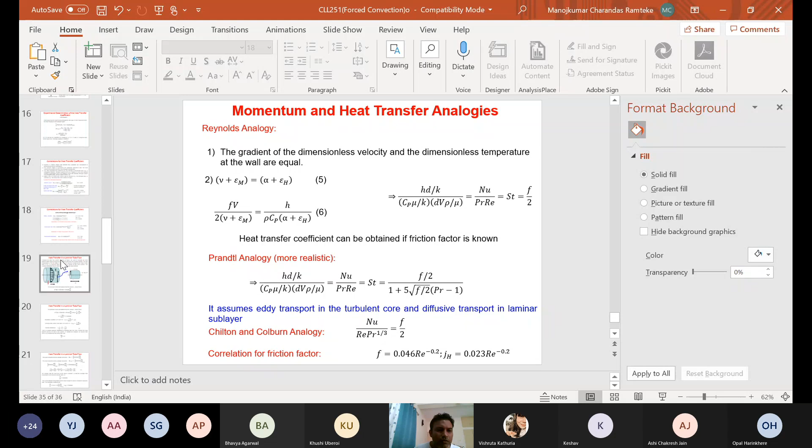Until the last class, what we have covered was the concept of boundary layer, then dimensional analysis. Based on the dimensional analysis, we said that different dimensionless numbers are going to be important when we are looking at the correlations. Then we looked at how to calculate the heat transfer coefficient, and after that we looked at different correlations.

Even though the dimensional analysis gives me the information about what dimensionless groups are important for a particular heat transfer, most of the time the formulation of this correlation is done such that it is close to reality. For example, in this correlation given by Hausen, the Nusselt number is given as 3.66 plus a term which is a function of Reynolds number and Prandtl number. This value of 3.66 is not coming arbitrarily - there is some logic behind it.

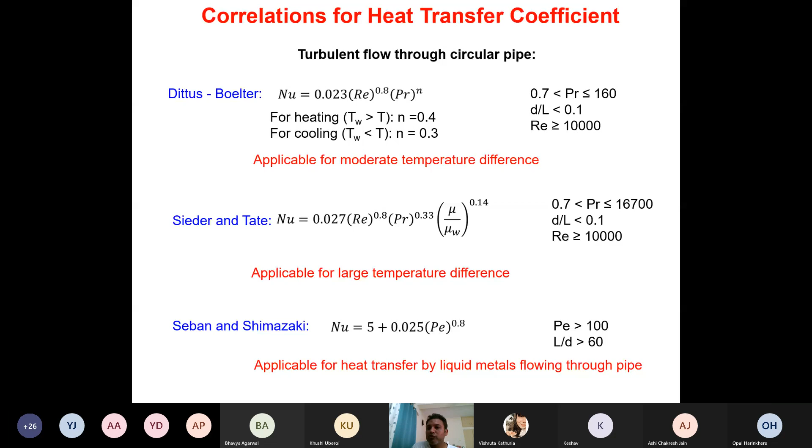So one simple analytical derivation we are going to look at is for pipe flow. Of course this is a very simple case, but even for a simple case of pipe flow, you can see the mathematics becomes really difficult. That is the point why people have made correlations instead of solving it analytically, because that becomes mathematically almost impossible to solve. So in this case, consider a tube flow system as shown in the figure.

We wish to calculate the heat transfer under fully developed flow conditions when the flow remains laminar. The wall temperature is TW, the radius of the tube is R0, and the velocity at the center of the tube is U0.

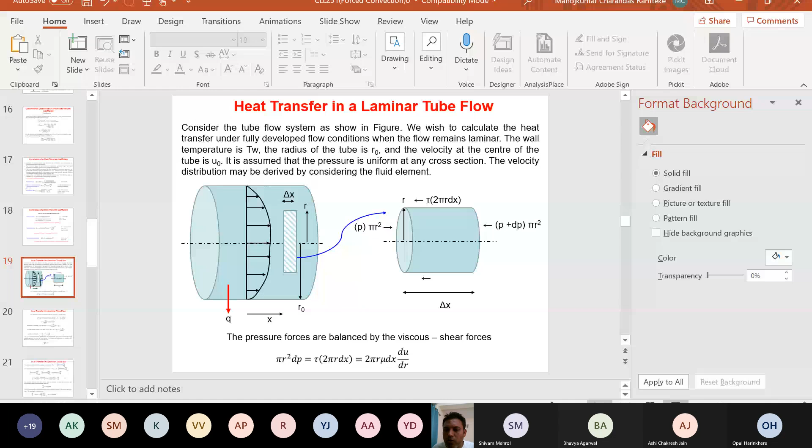It is assumed that the pressure is uniform at any cross section. Hello, yes, slides are not visible. Sir, your screen. Yes sir, okay let me just share. Is it visible now? Yes sir, okay.

So it is assumed that the pressure is uniform at any cross section. The velocity distribution may be derived by considering the fluid element. So here this is the section of the pipe shown, and the velocity profile is also shown. In this particular case, clearly for pipe flow, along the radial direction the heat transfer area is going to change, and therefore a shell balance is made.

So this is a particular shell with thickness of delta x along the x direction. So this shell is analyzed separately. For this particular shell, the thickness of the shell is delta x. The force input on the left hand side is P into pi r square, whereas the force input from the right hand side is P plus dP into pi r square. Again, the shear stress is acting in the opposite direction, so that is tau into 2 pi r dx. So this is tau, okay.

So we can make a force balance here for a given shell. The force balance in this case is the pressure forces balanced by the shear stress, isn't it? So if you put all the input and output terms here, what you get is pi r squared dp should equal shear stress tau into 2 pi r dx. And if you rearrange the term, tau can be represented as mu du by dr.

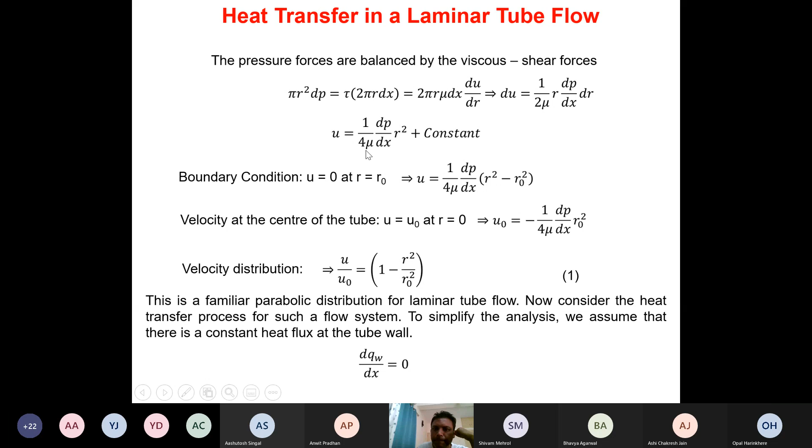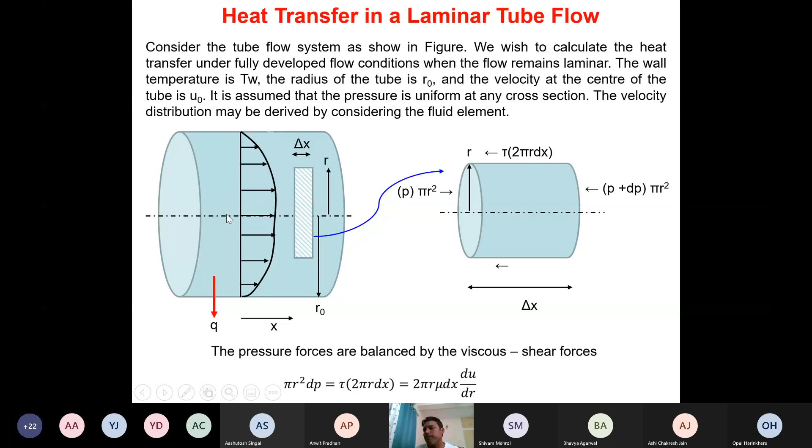If I go back, the temperature here is TW at the wall, and at the center the temperature is, let's say, TC. Between TC and TW there is a variation in temperature, and because of that viscosity may change, Cp may change, the density may change, and there is also a change in velocity taking place. So all these factors are accounted for in calculating the average value of temperature, averaged over all the variable quantities -- radius is changing, rho is changing, Cp is changing, velocity is changing, and temperature is also changing, isn't it?

So this temperature Tb is nothing but the average temperature over all these variable quantities like R, rho, Cp, and u.

So this is nothing but a bulk temperature, also referred to as cup mixing temperature. Now we wanted to find out Tb, because the heat flux is given as h times (Tw minus Tb). Tb we can directly obtain from equation number 3.

So equation number 3, if we put it in this particular expression and integrate it, what we are supposed to get, I have not done the integral directly here, but I am giving you the final answer. The bulk temperature is obtained as Tc plus 7 by 96 u naught r naught square, dou t by dou x, divided by alpha.

So this is what you get from equation number 3 and this definition of bulk temperature. If you put equation number 3 in this integral and solve it, what you get is this next expression: Tb equals Tc plus 7 by 96 u naught r naught square by alpha into dou t by dou x.

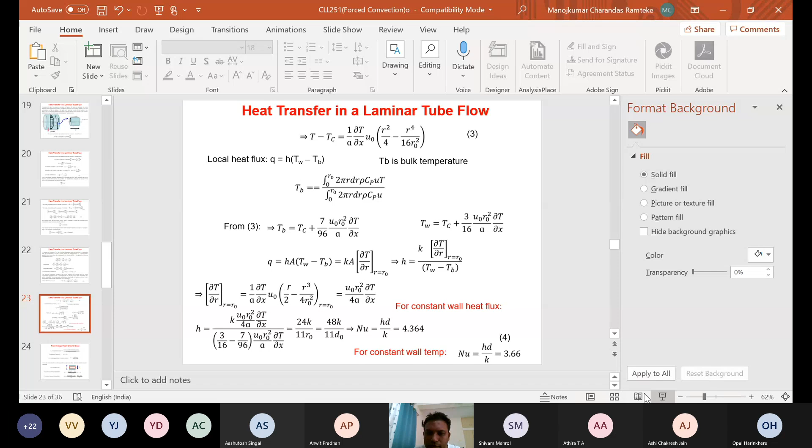Sorry for this mistake. So the heat transfer coefficient is obtained as K dou T by dou R at R equals to R naught, divided by Tw minus Tb, and we can put all the parameters here. We know Tw, we know Tb, and we have already calculated dou T by dou R by differentiating equation number 3 and putting R equals to R naught. So all these terms we know.

If we put it in this particular equation, what we get is heat transfer coefficient is obtained as 48K by 11 D naught. And if we rearrange this, what we get is Nusselt number, given as HD by K, that comes out to be 4.364. So this is very important.

The Nusselt number in a laminar pipe flow with constant wall heat flux is given as 4.364. Directly we can write this. So that is why you will see that most of the correlations for constant wall heat flux will start with this number. And in a similar manner, this entire analysis can also be extended for constant wall temperature.

But in that case, one more complication comes into the picture, that is this dou T by dou X term. This is not constant, in fact this is a function of radius r. So this has to be obtained separately, and then this entire analysis has to be done, but that is not done in this particular case. If you do that analysis, it is there in several books.

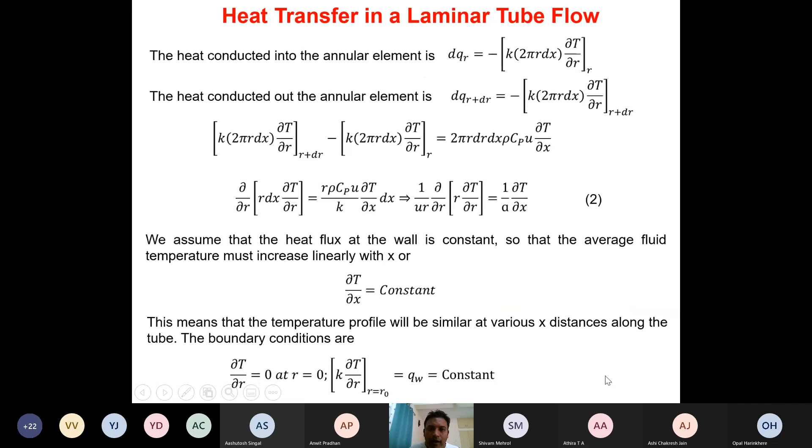What you will get is Nusselt number comes out to be 3.66. So this is the rationale behind using constants like 3.66 in such correlations.

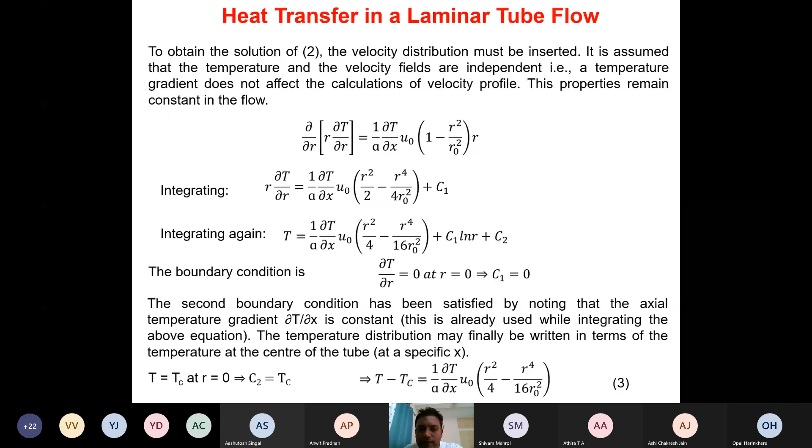Okay, now let us move to the next topic. So far we were looking at the flow through the circular pipe, but in some cases you will see there is an annular flow, in some cases you have a rectangular channel. In all such cases, how to solve the problem? Because most of these correlations are given in terms of pipe flow. So can you apply these correlations of the pipe flow for such non-circular geometries?

The idea of using these correlations of the circular systems or pipe flow for non-circular duct can be done by obtaining the equivalent diameter. So equivalent diameter is nothing but 4 into hydraulic radius. Hydraulic radius is given as the cross-sectional area of the flow divided by the wetted perimeter. This we have already seen in the last tutorial class, where we calculated the equivalent diameter for the annular region as 4 into cross-sectional area of the flow divided by wetted perimeter.

So for a rectangular duct of sides L1 and L2, the equivalent diameter can be obtained as 4 times L1 into L2, where L1 into L2 is the cross-sectional area for the flow, and the wetted perimeter in this case is 2 times L1 plus L2. So the equivalent diameter is 2 L1 L2 divided by L1 plus L2. That's it.

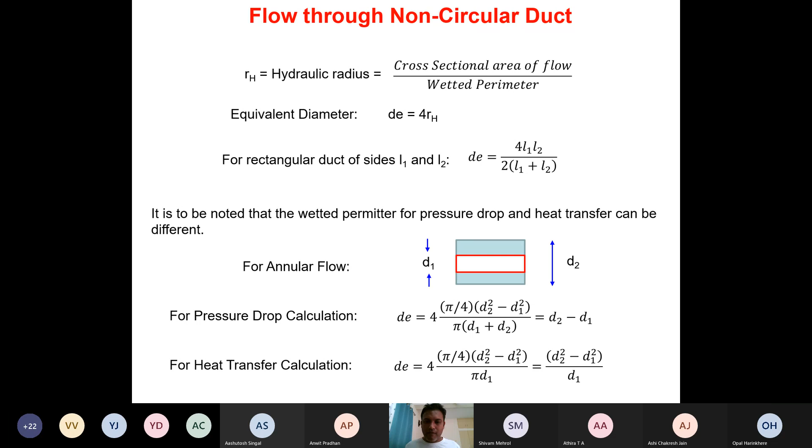Now, so far we were only looking at flow through the pipe or flow through the rectangular duct or something like that. The heat transfer also takes place whenever there is external flow. The first case is the flow over a flat plate, flow across the flat plate. That is the first case. In such cases, the Nusselt number is defined in terms of the distance x.

So x is the distance from the leading edge of the plate. The Nusselt number Nu_x, defined in terms of the distance x from the leading edge, for a laminar boundary layer is given as 0.332 times Reynolds number Re_x raised to the power 1 by 2, times Prandtl number raised to the power 1 by 3.

So this particular correlation we have already seen in the last tutorial. Again, this correlation is valid when Prandtl number is between 0.5 and 50, and the Reynolds number, calculated based on the distance x from the leading edge, should be less than 5 into 10 raised to the power 5.

This 5 into 10 raised to the power 5 is the critical Reynolds number for the flow over a flat plate. So when Reynolds number is less than this value for flow over the flat plate, the flow is laminar.

Beyond this, there is a transition zone. For a turbulent or transition zone, the Nusselt number is defined as 0.0296 Reynolds number raised to the power 4 by 5, into Prandtl number raised to the power 1 by 3. This equation is valid for Prandtl number between 0.6 and 60, and Reynolds number between 5 into 10 raised to the power 5 and 10 raised to the power 7.

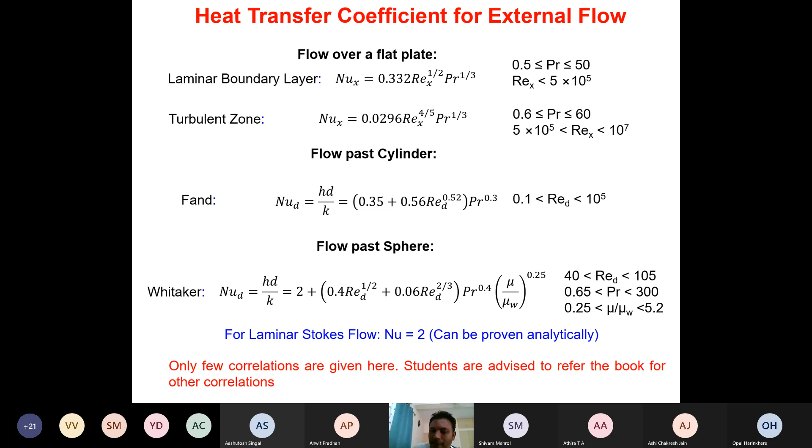All right. Hello. All right, sir. Yes, sir. Okay.

Now let's move to another system. This is a very important system, because it is so regularly used in the industry.

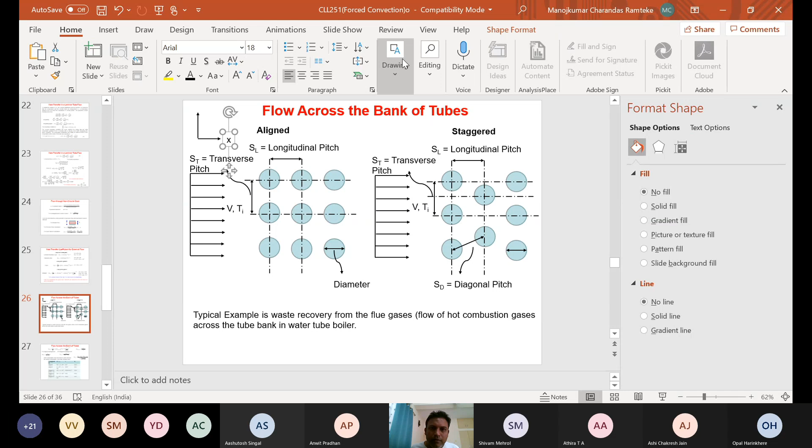So this is the X direction, and this is the Y direction. The tubes are arranged in a Z direction, which is perpendicular to the plane.

And the flue gas is flowing across these tubes in the X direction. So the flue gas flows across the tubes along the X direction.

Now, the temperature of the flue gas on the left hand side is T1, and on the right hand side is T2. As the flue gas moves across this bank of tubes, heat gets transferred because water is flowing through the tubes. This water takes heat from the flue gas, and because of that the flue gas cools down as it moves along the X direction.

Again, this is a commonly used heat exchanger for recovering heat from flue gas. There are two configurations in which the tubes are arranged: the aligned configuration, where tubes are arranged in a properly aligned manner, and the staggered configuration, where tubes are arranged in a staggered manner.

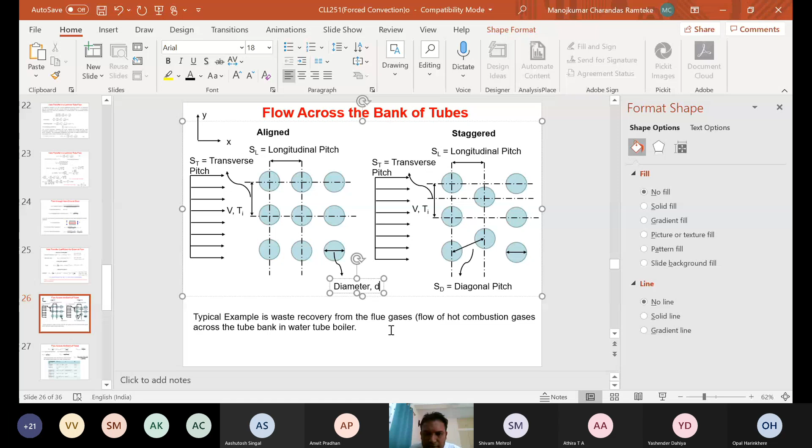Now correlations are given for such systems. The commonly used correlation is the Nusselt number, defined in terms of the diameter of the tube, D. This Nusselt number, defined using the diameter of the tube, is a very important thing here.

It is given as HD by K, equal to C into Reynolds number max raised to the power m, into Prandtl number raised to the power 0.36, and in the bracket, Prandtl number divided by Prandtl number at wall, raised to the power 0.25. This basically gives mu by mu w, since Prandtl number is Cp mu by K; Cp and K are constant, and Prandtl number at the wall is Cp mu wall by K, so this ratio gives mu by mu w directly.

Again here the Reynolds number is based on the diameter of the tube and maximum velocity, and therefore it is defined as RD max, RED max. So this RED max is nothing but the Reynolds number defined in terms of diameter of the tube and maximum velocity. So this is given as d rho V max by mu, where V max is nothing but the maximum velocity.

Why we are saying the maximum velocity? Because as the flue gas, which is having a velocity of V, moves across this bank of tubes, the cross sectional area is going to reduce because some of the area will be occupied by the tube. And since the area is minimized, the velocity of the fluid flowing across this tube is going to increase, and that velocity is defined as maximum velocity.

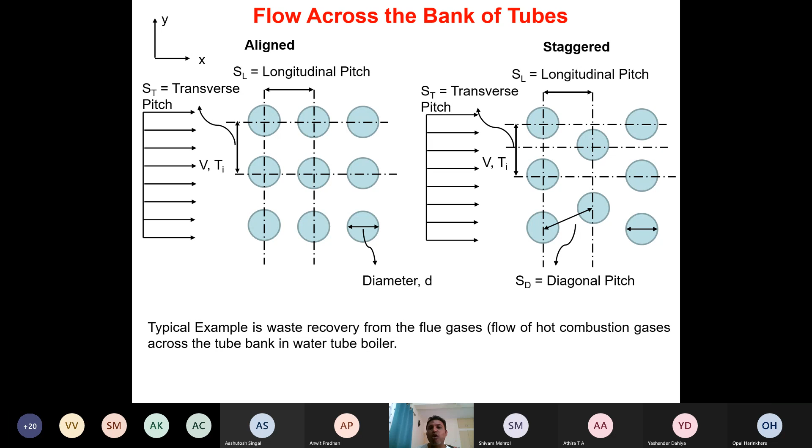So clearly the temperature difference at one end here is going to be TW minus T1, whereas the temperature difference on the right hand side is going to be TW minus T2. And this TW minus T1 and TW minus T2 temperature difference is going to be different as we move from left hand side to right hand side. And in such cases, what we have to use is log mean temperature difference.

Remember, that is what we said, when the driving force is changing as we are moving along the x direction or along the length, in such cases, instead of using the normal temperature difference, what one has to use is log mean temperature difference. And therefore in this case the temperature which has to be used is log mean temperature difference, which will be defined here as Ti minus Ts, minus T naught minus Ts. So T naught is the temperature on the right hand side, Ti is the temperature on the left hand side, and delta Tm is the log mean temperature difference.

Again, as I said, there are different configurations: aligned, staggered, and also the Reynolds number is going to vary. So depending on that, there are different configurations possible. One is aligned with Reynolds number between 10 raised to power 3 and 2 into 10 raised to power 5. Another is aligned, but the Reynolds number is above this particular limit.

Then there is a staggered arrangement in which ST, which is the transverse pitch, divided by SL, which is the longitudinal pitch, if it is less than 2 and the Reynolds number between 10 raised to power 3 and 2 into 10 raised to power 5, in that case different constants of C and M has to be used. So these are the different configurations. For different configurations, the constant C in this equation and the constant M has to be selected from this table, and then based on that the correlations have to be used to calculate the heat transfer coefficient.

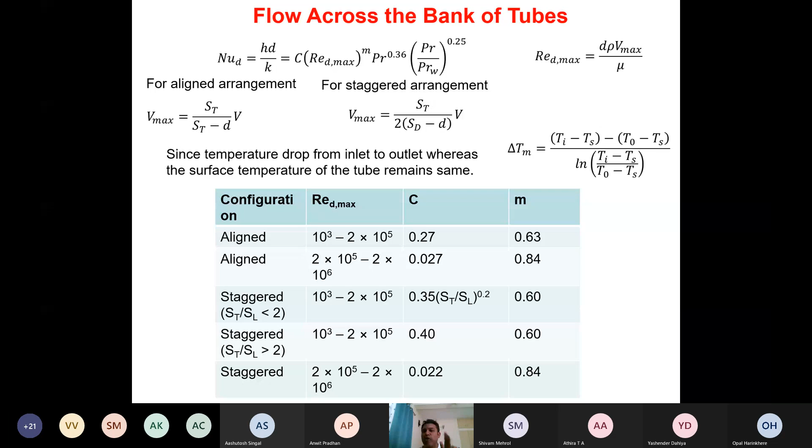So anyway, we are going to see this particular case in more detail when we look at the tutorial problem. So in the next tutorial, we are going to look at the problem solved on this.

So, the flow past the bank of tubes—in most chemical applications you'll see a packed bed or a fluidized bed where flow takes place across different packings. These packings could be spherical or in other shapes. For such cases, for a packed bed, the heat transfer correlation to be used is given here.

Here epsilon is the voidage factor. ST is the Stanton number, which is the Nusselt number divided by Prandtl number into Reynolds number, into Prandtl number raised to the power 2/3, and that is given as 2.06 Reynolds number raised to the power minus 0.575. Here Reynolds number is defined in terms of the diameter of the particle.

This is valid for Prandtl number equal to 0.7, and Reynolds number between 90 and 4000. Here Reynolds number is defined in terms of superficial velocity and diameter of the particle. A similar correlation exists for a fluidized bed: the Nusselt number, NuDP, is given as HDP by K equals 2 plus 0.6 Reynolds number raised to the power 1/2, and Prandtl number raised to the power 1/3.

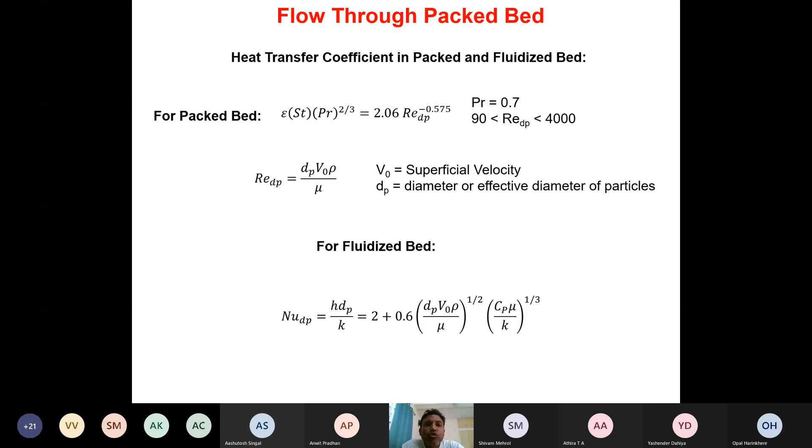Important factor now—important. We wanted to see heat transfer with a variable driving force. Remember, so far whenever the driving force delta T changes across the length, we used delta T LMTD, log mean temperature difference. At that time I said we would see the derivation later. For now, let's assume that whenever temperature difference or driving force changes across the length, we have to use a log mean temperature. So let's derive that.

The calculation of the rate of heat transfer becomes very simple if the overall heat transfer coefficient, the area of heat transfer, and the temperature driving force all remain constant. But if you look at most practical cases, one or more of these is varying.

If you look at a cylindrical system, the heat transfer area is varying. Again, when we look at boundary layer heat transfer, the heat transfer coefficient varies as we move from x equals 0 to some value x equals L. So as we move from the leading edge, the heat transfer coefficient varies.

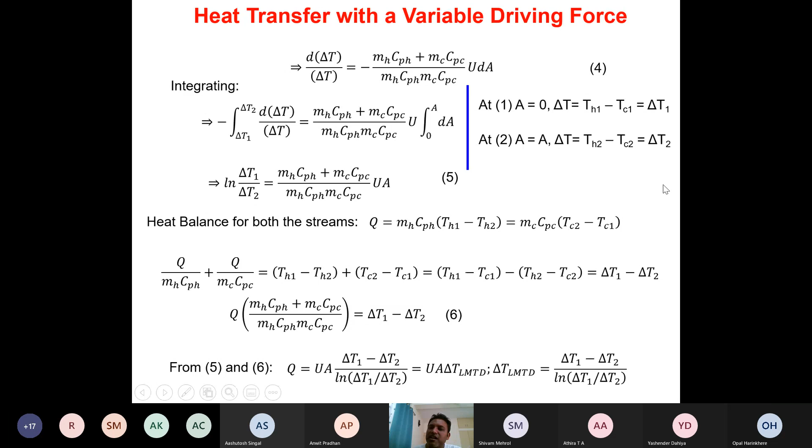Now in this case, this factor, mHCpH plus mccpc divided by mHCpH mccpc, can be eliminated by making an overall balance. So let us make an overall balance between these two ends. Whatever heat is lost by the hot fluid should be the same as whatever heat is gained by the cold fluid, and that is what is written here. So heat lost and heat gained both should be the same, equals Q, and heat lost is given as mHCpH, TH1 minus TH2.

So this is the balance between both ends, 1 and 2. The temperature changing between end 1 and 2 is TH1 and TH2, therefore the entire temperature difference is TH1 minus TH2. And that should be the same as heat gained by the cold fluid over the entire length L between locations 1 and 2, so that is given as mccpc, TC2 minus TC1.

Now from this equation, Q by mHCpH is given as TH1 minus TH2. Similarly, Q by mccpc is given as TC2 minus TC1, and both these factors can be summed up. So Q by mHCpH plus Q by mccpc equals TH1 minus TH2 plus TC2 minus TC1, and this right hand side can be rearranged.

So TH1 minus TC1 we can put as one factor. What is the remaining thing? Remaining is minus TH2, so we can take a minus sign here, and in another bracket we can have TH2 minus TC2. Remember, TH1 minus TC1 is nothing but delta T1, whereas TH2 minus TC2 is nothing but delta T2. So that means delta T1 minus delta T2 is nothing but this entire factor on the left hand side, so this left hand side factor can be rearranged as Q.

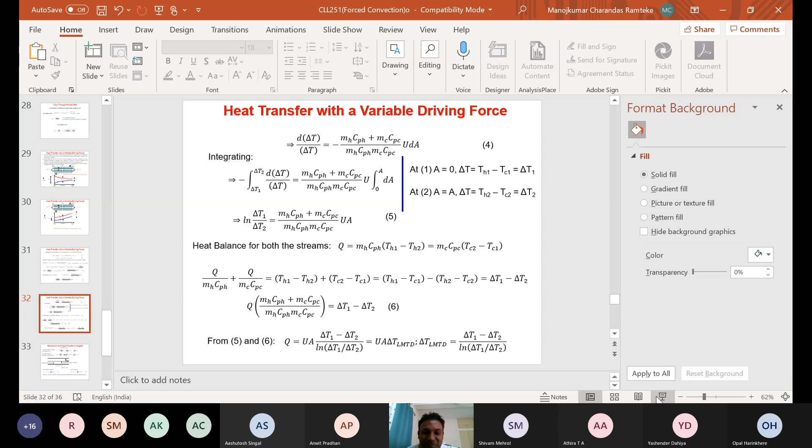Anyway, so the point I wanted to make here is, for a co-current flow, the heat transfer Q is given as UA delta T LMTD, and not UA delta T. Why? Because the temperature difference delta T is varying as we are moving from location 1 to 2.

Now another question you can ask: if let's say delta T1 is same as delta T2, in that case Q is obtained as UA delta T1 or delta T2, doesn't matter. You can directly get it from this equation. If you apply L'Hopital's rule, then what you are going to get is Q equals UA delta T. That's it. The same expression you are supposed to get if you solve it.

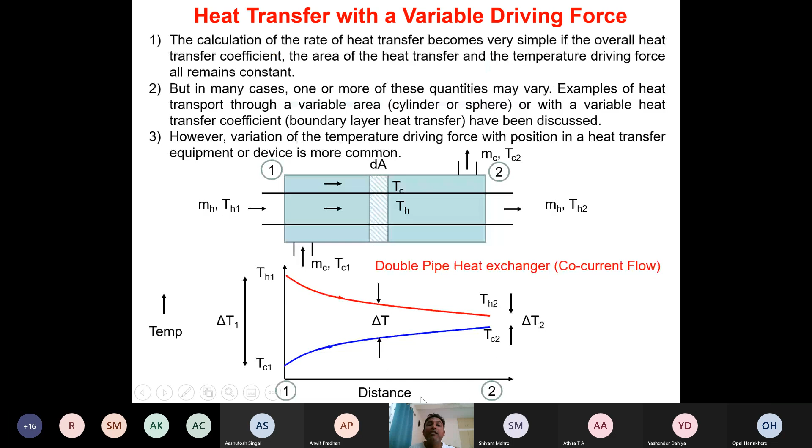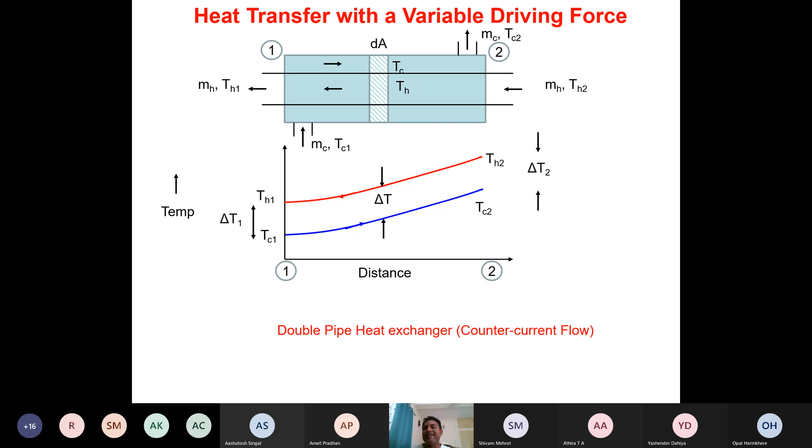Remember, in this case we have solved it for co-current flow. But if you do the same analysis for the counter-current flow, which is the second figure, you are going to get the same thing. In fact, this derivation is given in the book, you can just go through it.

I have done the derivation only for the co-current flow. For the counter-current flow, you are supposed to get the same expression. In case of counter-current flow also, Q is given as UA delta T LMTD.

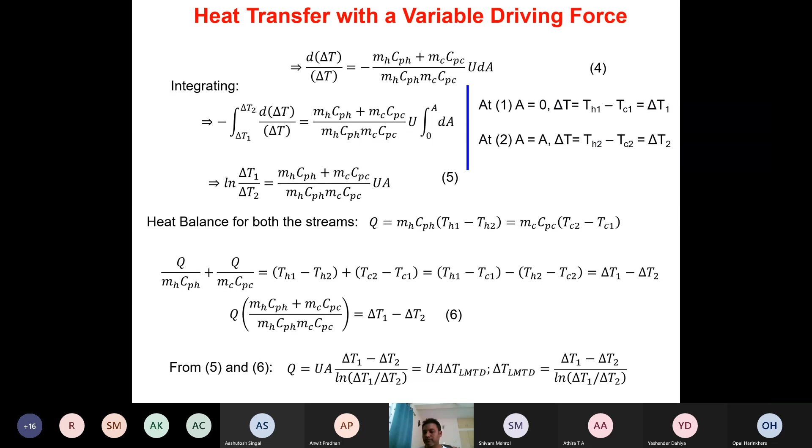That's it, so there's a last topic, but I think it is too much for today, so I will not cover this last topic. We will cover this part maybe in the next class. But I wanted to discuss about the quiz a little bit, and then we will stop. Is it all right?

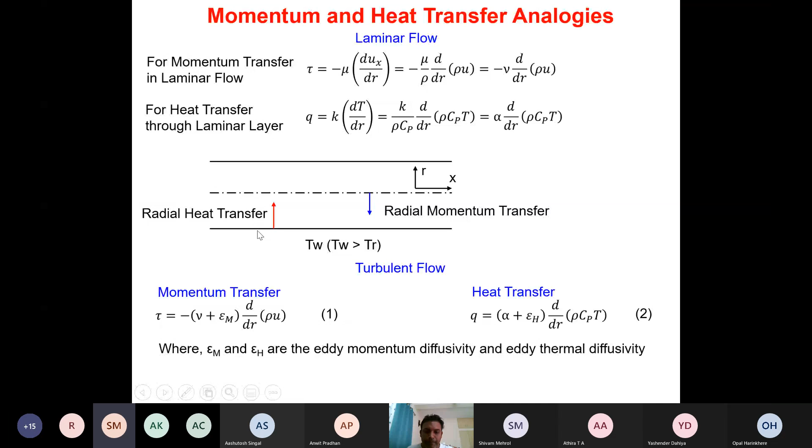Hello? Is it all right? Yes sir, we still have some time before the next class. So I will just quickly share with you the solution of the quiz.

Anyway, most of the students have done well. In fact, there are 4 students who got full marks. Unlike last year when there was a lot of chaos in conducting the examination, this time I felt quiz one was very smooth, not only for me but also for you, because I got fewer queries and I could see that many students have done well.

There is a request from one student, I don't remember the name, the request was to change the examination from the normal numerical type answer quiz to an essay type quiz, where you upload your answers and I have to grade all your answers on Moodle. But that is not realistic. I'm really sorry to say, but that is not realistic in the sense, because I do that.

I generally do that for a size of 50 students when I used to teach the elective course. So every next semester I'm going to take the elective course, I have done the elective course in the last semester. So in all the elective courses I do that type of grading, because...

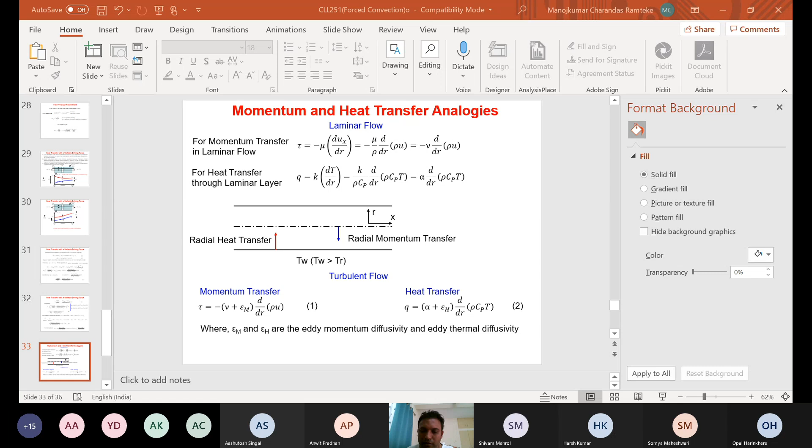So let me share the solution. Is it visible to everyone? Yes, sir. Okay, so the first problem was very easy. Mostly half of the part we have already solved in the class itself, isn't it? You only have to put in the values and get the answer.

Based on that, you can apply the boundary condition: at x equals 0, the temperature was 160, and at x equals whatever the value was for your case, the temperature was 120. You put this in the equation and obtain C1, C2, and then you get the temperature distribution equation. You can differentiate this temperature distribution equation and equate it to 0 to get the location for the maximum.

For the location of the maximum, I could see almost 95% of students have done both these parts correctly, part A and part B. Almost 95% of students have done well, but some students have made mistakes.

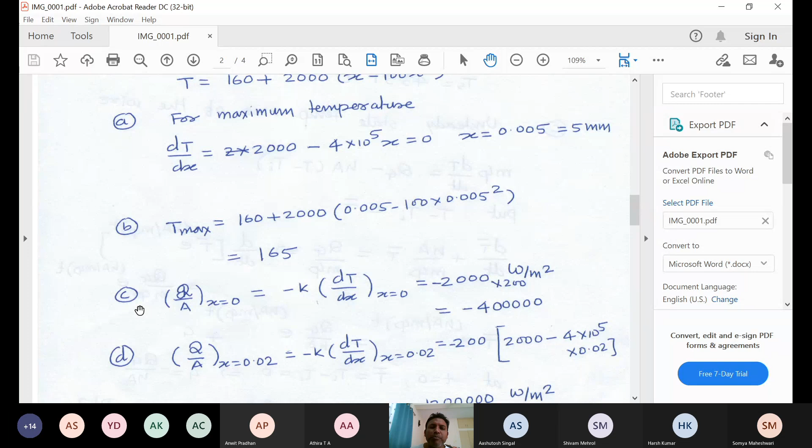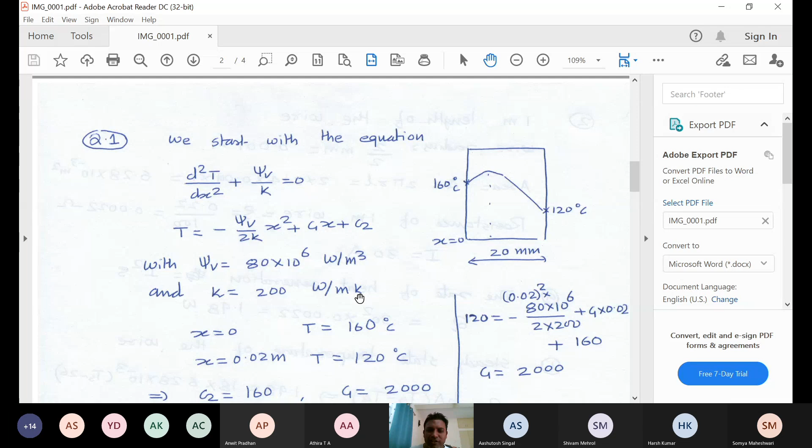In part C, you were asked to calculate the heat flux at this location, the heat flux on the right hand side, and the heat flux at the center. The heat flux on the left hand side comes out to be negative. That comes out to be this C1 into K, minus K. Some students missed the minus sign or something, but these are the places where students made mistakes. Mostly for problem number one, almost everyone got the correct answer. So almost 90% of students got this first question correctly.

The second question was a little bit difficult, but not too difficult because we had solved a similar problem earlier. How to calculate this Q was very clear, because we solved one similar example: I squared rho gives you Q. Here, the radius was varying, the current I was varying, and the transfer coefficient H was varying. So the first thing was very clear - you calculate Q as I squared rho, and you directly obtain that based on the values given. This part, mostly people have done correctly.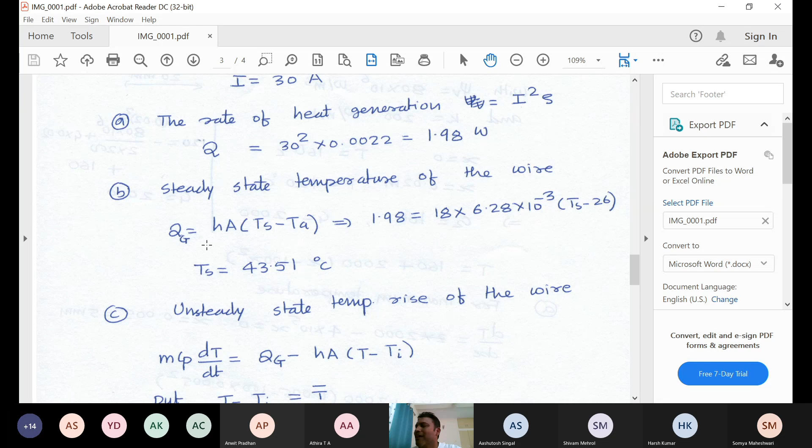Then we wanted to find out the surface temperature in the steady state when giving an infinite amount of time. We can find the steady state temperature just by making a steady state balance: whatever heat is generated should be the same as the heat taken by convection. So that becomes H A (Ts minus Ta), where Ta is the ambient temperature.

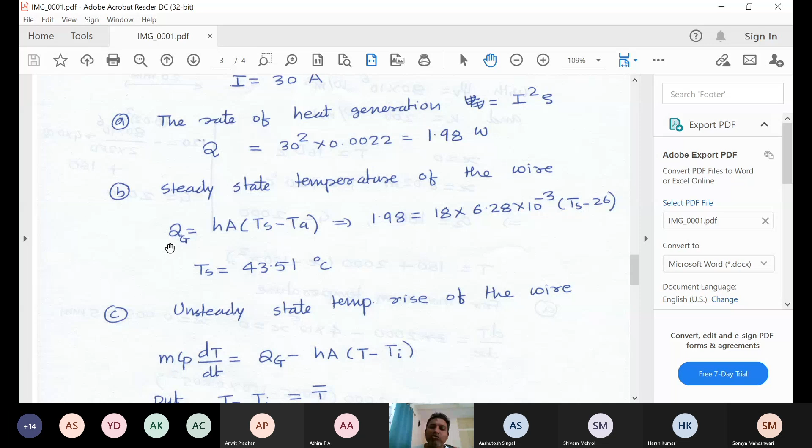So that is already given, so Ts we can back calculate. So this people have done it correctly.

Then part C, D, E, these were on the unsteady state. So if you make an unsteady state balance, in this case I have done the unsteady state balance. The accumulation term is given as mcp dT by dt, generation minus whatever heat is taken out by convection, which becomes hA times T minus Ti.

So here the question was asked to calculate the value of C and the value of D. I have given even this form of the equation, because I didn't want you to derive some other form, and then it would have been difficult to grade.

So I have even given the form where you have to find out C and D. C is obtained as Qg by hA, which comes around 17.51 in my case for the given values, and D is hA by mcp. Again, all these values were given, so you can calculate D.

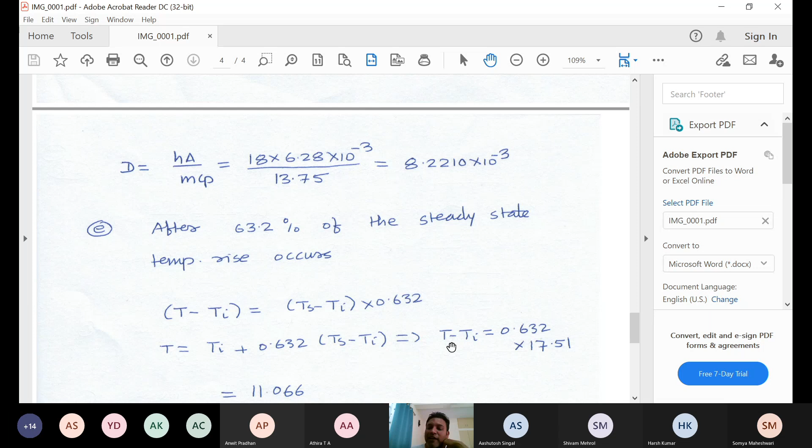The last part was how much time will be required to attain 63.2% of the steady state temperature rise. So the temperature rise is going to be the steady state value Ts minus Ti, multiplied by 0.632. So this value we already know, so from that we can find out T minus Ti, which comes around 11.066 in my case.

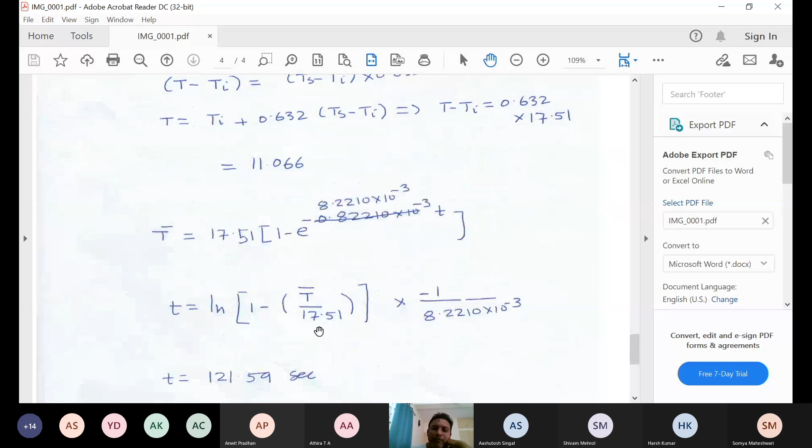That you can put directly in this equation. Using C and D in this equation, you back calculate the value of T. So the value of T in this case comes around 121.59 seconds. Okay, so this was also easy.

So the only message I wanted to give all the students who messed it up this time is, it doesn't matter. You try to do well in your minor, you try to do well in your quiz too, because anyway we are going to count best of 2 quizzes. So if you do best in this quiz, it's okay. If you don't do best in this particular quiz, there is one more chance to do the best, isn't it? So in the next quiz you do well, and that will be counted.

Generally the questions are not lengthy, sufficient time is given, you have all the time available with you. Don't make silly mistakes, because anyway it is corrected mostly by the Moodle. I only cross check if there is a query, but only the legitimate queries are answered. If you send some unrealistic queries, this will not be answered.

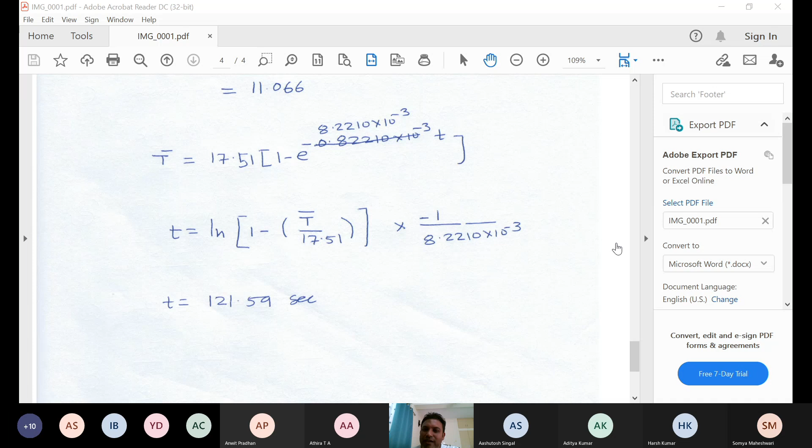Okay. So we stop here and see you, next week is the quiz. So Thursday will be the class next week. No sir, we have a major.